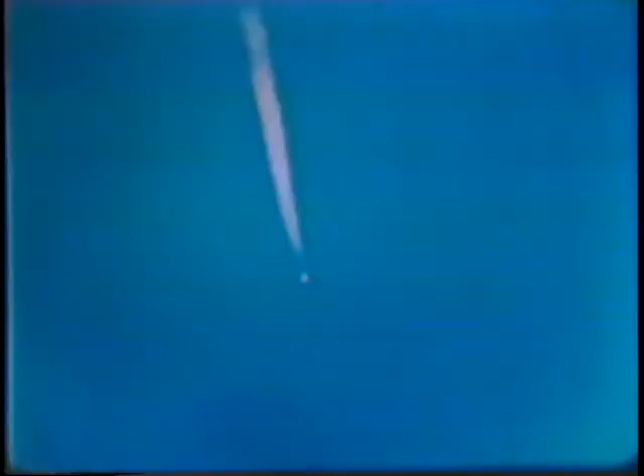Our ballistic missile early warning system tells us differently. 7, 6, 5... Not ours, but theirs. 3, 1... And if it is theirs,

and this is ours, a better design on the drawing board is no immediate effective countermeasure. Our birds must fly when they're required to. The high complexity of modern-day weapon systems demands the closest possible approach to absolute reliability. There is no second chance. So there must be absolute process control during system design and system manufacture.

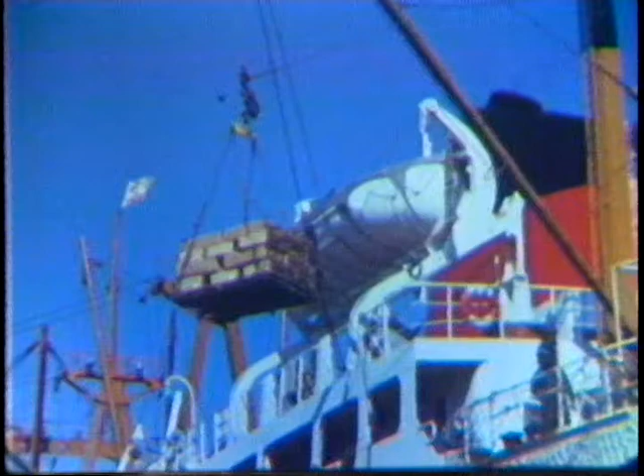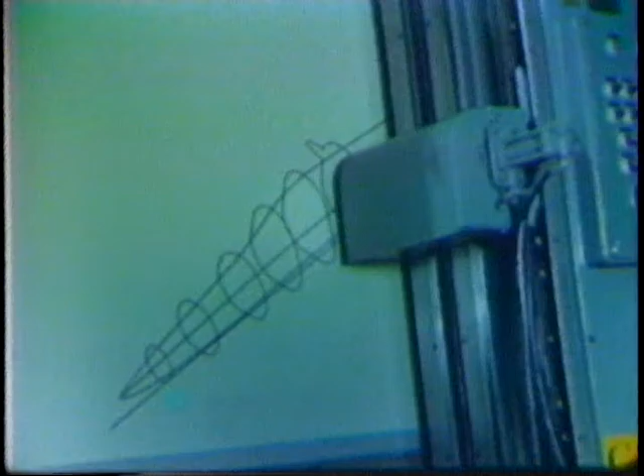We need newer and better weapons, and we need to get them from design concept and into operation more quickly and at a reasonable cost. We need new and better products for civilian consumption, products which can compete with foreign goods here at home or in foreign markets.

We must have modern manufacturing, as modern as we can make it. Modern manufacturing is a command performance. Command performance. Well, we don't usually have enough command of our process to get the performance we want.

Of course, it takes a lot of time to get from a set of new drawings to a finished product. But time is something we don't always have. The period from development to product is growing shorter and shorter. As someone said, time has collapsed.

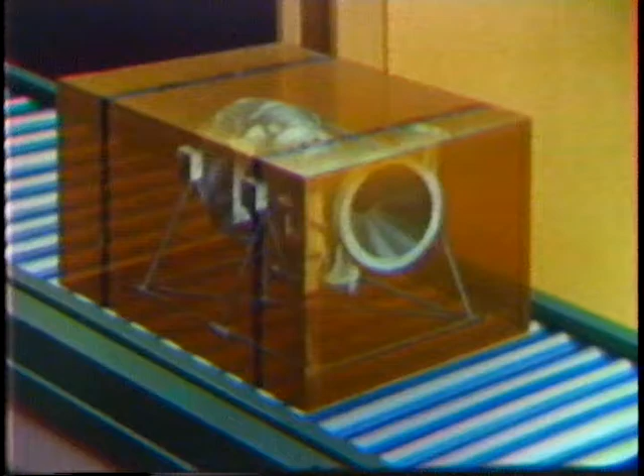And that component we were talking about is only one of many making up the complete product. Well, how could you do all that so quickly? Not only so quickly, but in much less space. You'd need a much larger plant to do this by conventional methods.

Oh, this is not conventional. Not at all. This is a modern plant. Really modern. What do you mean by that? When you give your command over the mic, which may be in the plant or remote, almost anywhere, the information feeds into a voice converter, which translates your language into a language which the computer can understand.

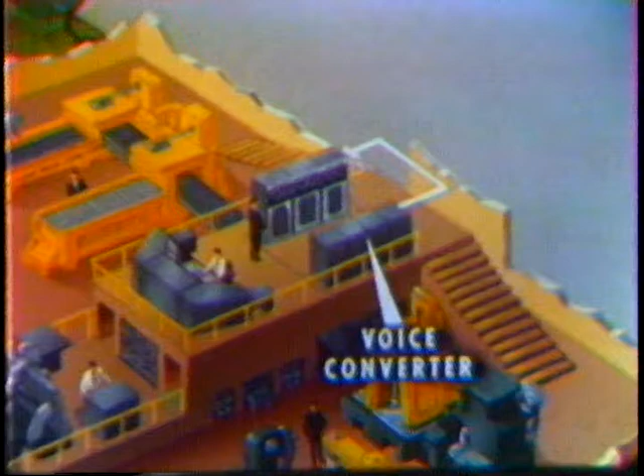The computer analyzes your request, then draws on its store of information to produce a series of tapes, which feed into a production control center. This center not only controls each of the machines, but the flow of parts as well, acting as a scheduling unit.

Now all of the manufacturing units are actuated. Basic shapes are routed to production centers for complete processing. Completed components are then checked automatically by inspection machines, then sent on to a robot subassembler. Subassemblies proceed on to a robot for final assembly, and then on to shipping.

That's what I call command performance. Of course, I've oversimplified the process a bit. You mean you've been putting me on, don't you? Not exactly. This is not as fantastic as you might think. Take the computer, for example.

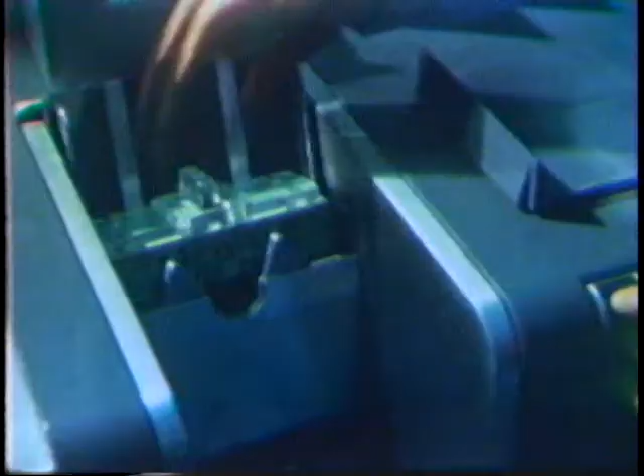Computers are fairly common today, although we still must talk to them with cards or tape rather than directly. But they're getting more sophisticated all the time. And from this information, a control tape is produced. Control tape for what? To control a manufacturing process.

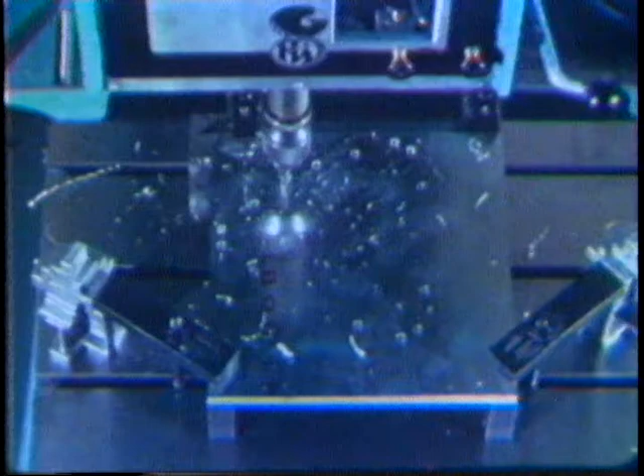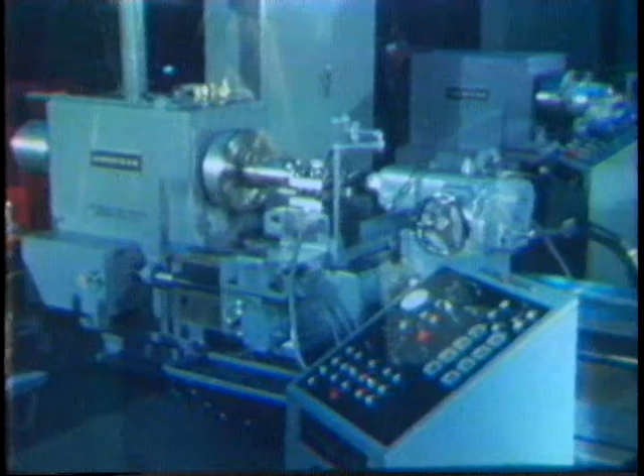Now these machines are in existence today. Inexpensive tape-controlled drill presses. The more sophisticated turret drill presses. Vertical turret lathes, capable of high-accuracy contouring. Tape-controlled engine lathes, with equally exacting contouring and thread-cutting capabilities.

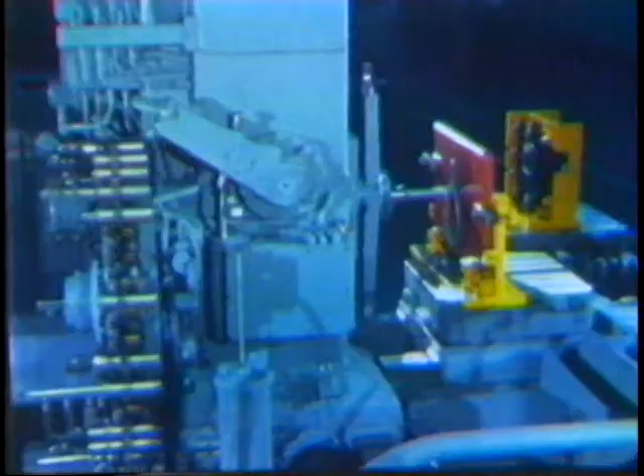High-precision multi-axis profiling mills. Machining centers that change tools, mill, drill, bore, ream, and tap. In many cases, they can complete the entire manufacturing process in just one setting, fully capable of doing that job of yours we were talking about, and even more.

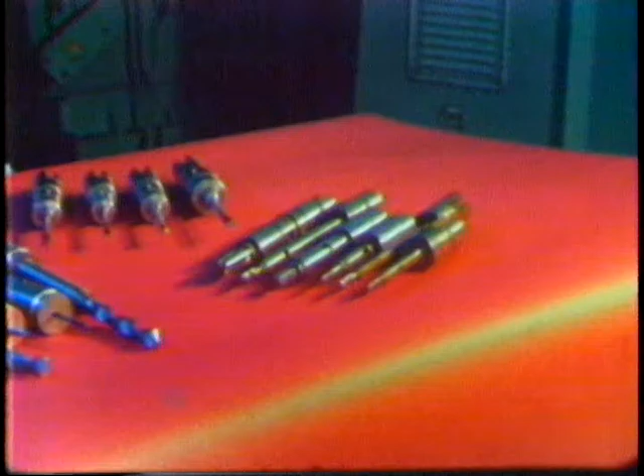Now, what different tools would you need for this piece? 6 different milling cutters, 4 sizes of drills, 4 reamers, 6 taps, and 4 boring bars. And where you needed 8 machines to use these tools, the whole batch is loaded into a magazine for use by this one machine.

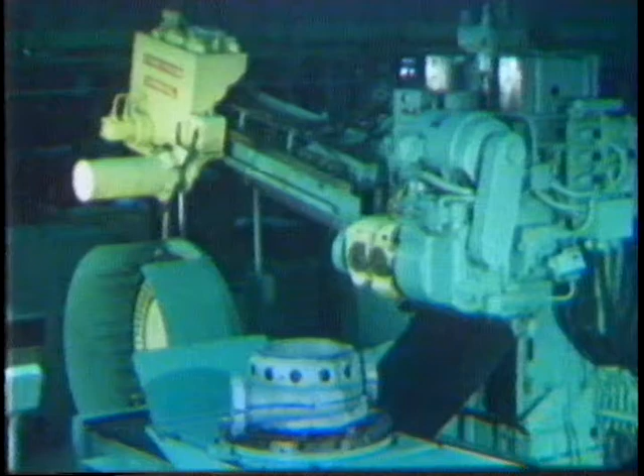All the instructions to the machine are on a punched tape. The intelligence on the tape tells the machine exactly what to do. This is called numerical control, which is one of the means of using mathematical definitions to furnish intelligence a machine can understand. There are many methods of accomplishing this. However it's done, it certainly shortens the chain of command and greatly reduces the opportunities for a breakdown in communications.

There's the same casting you would have started with in your conventional shop, but notice only clamps are required. The machine itself will even make its fixtures from tape control if necessary. And there you are, all the machining done in only 45 hours.

How long would it have taken in your shop? About 300 hours to machine and 26 weeks of lead time, after you've tooled up. Remember, the lead time here was only 2 weeks. If you need a second, third, or fourth piece, you get them in a matter of hours, all exactly alike. Now that's performance.

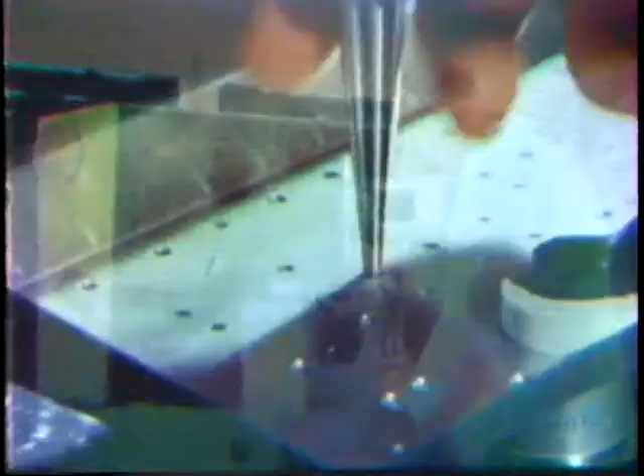What happened to automatic inspection you were dreaming about? That was no dream. They're already in existence, too, and research and development are making them better all the time.

On this machine, a probe is guided by a tape similar to the one used in manufacturing the part. The measurements are recorded for inspection and record.

But you still need an original detailed drawing, don't you? Not necessarily, but if you want one, it can be made from a numerical control tape too, operating an engineering machine. Often the drawing can be made at the same time the part is being made, using instructions from the same tape.

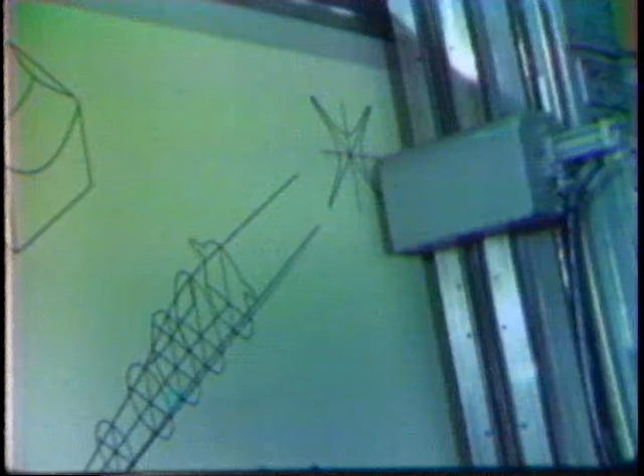I noticed the loading and removal from the machine is still conventional. But it needn't be. You'll find automatic loaders and transfer mechanisms on a lot of production lines today.

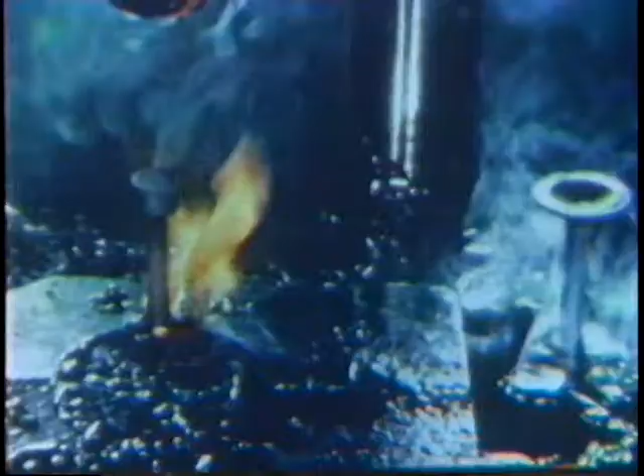This automatic material handler remembers every sheet in its inventory and will deliver it undamaged in seconds.

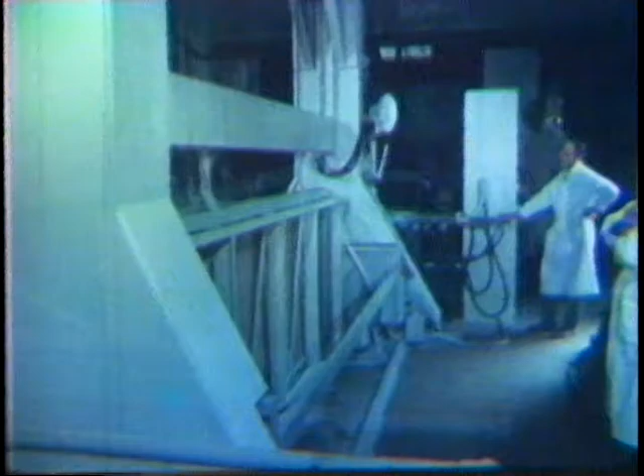This robot manipulator will perform a variety of handling operations. It can be easily taught to load, unload, and assemble parts because of its electronic brain.

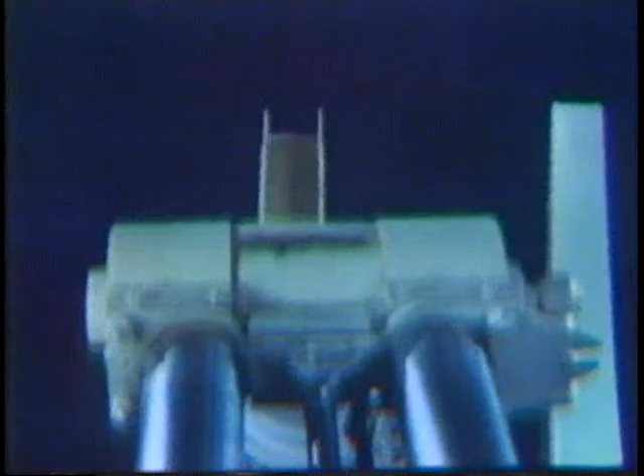So you see, we have practically all the elements of our plant of the future. It's just a matter of time before someone puts them all together to make the dream a reality.

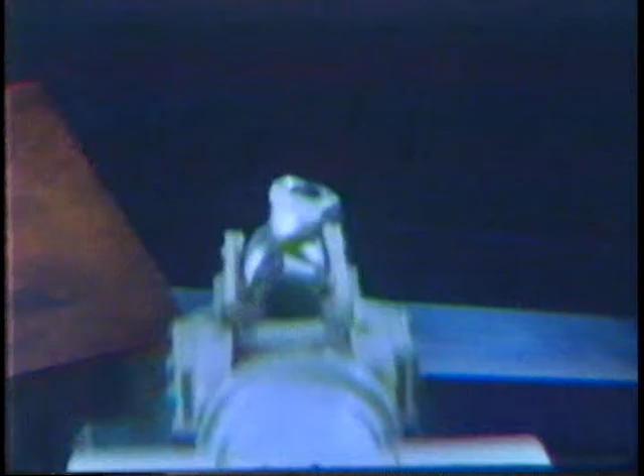I don't know that anyone has ever produced a crystal ball on one of these machines, but you don't need to be a fortune teller to realize that our success in aerospace depends upon our national capability to produce combat-ready systems with complete reliability. We must produce first, best, and at the lowest possible costs, which are consistent with reliability and reproducibility.

This means that we must be able to manufacture from all sorts of new and exotic materials. It means we must be able to produce structural members with a high degree of configuration complexity. It means we must produce with greater dimensional control.

Some large rocket engine inducers, for example, can't be produced to design concept by conventional manufacturing methods. It means that we must produce components which have structural integrity.

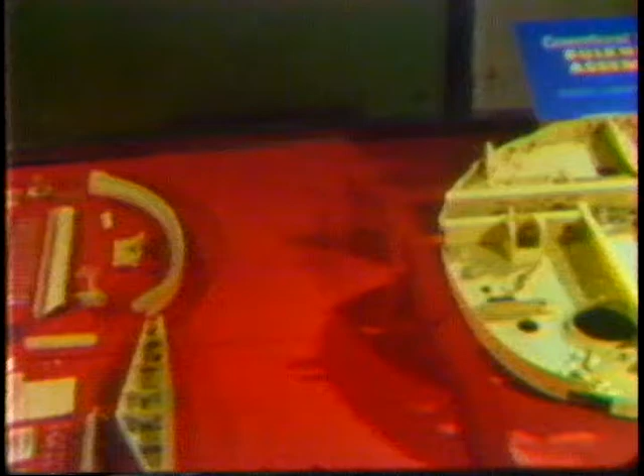This aircraft bulkhead was built up of over 90 different parts, requiring more than 1,000 rivets and high-strength fasteners. You can imagine how long it took to tool, machine, and assemble all these parts, and you can imagine the possible human error involved.

The more modern one-piece bulkheads have greater structural integrity, but they were still expensive. These one-piece bulkheads were first produced by conventional methods, using specially designed tracer-controlled rotary tables with many coordinated overlay templates and tracer patterns. It took 160 hours of machining time to produce one bulkhead, and at considerable cost.

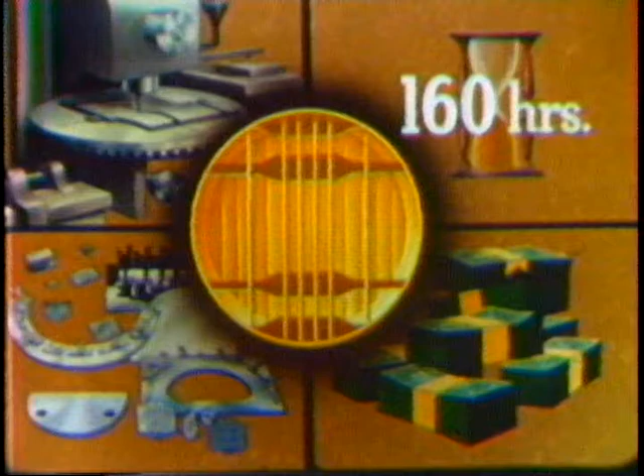The part is now programmed on a numerically controlled skin mill to machine two at a time. This requires only two sets of vacuum chucks and nine reels of tape. The time was reduced to only 9 hours per part, and the cost reduced by 80%. In addition, there's a 25% reduction in weight.

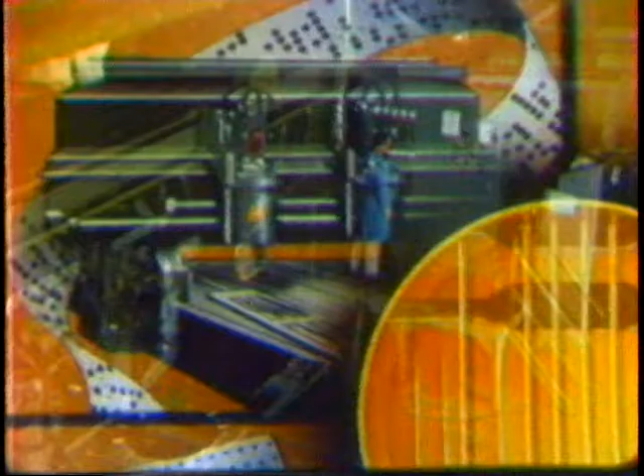Command performance? I'll say. But you can best get it with numerically controlled machines.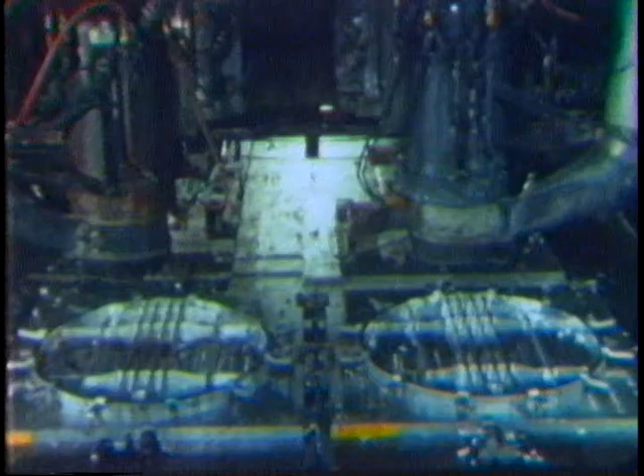Can this type of control be applied to other types of machines? Certainly. There are machines that automatically position and punch all types of panels.

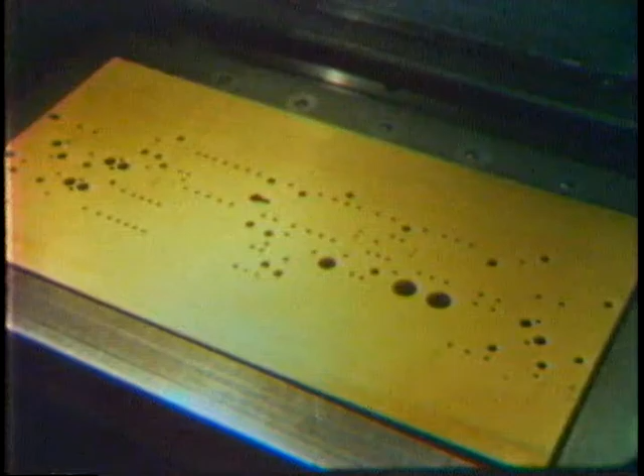Machines which build up rocket motor cases by the controlled winding of glass filament.

Machines that position connector panels for wiring, and machines that position and make the wiring connections on assembled electrical panels.

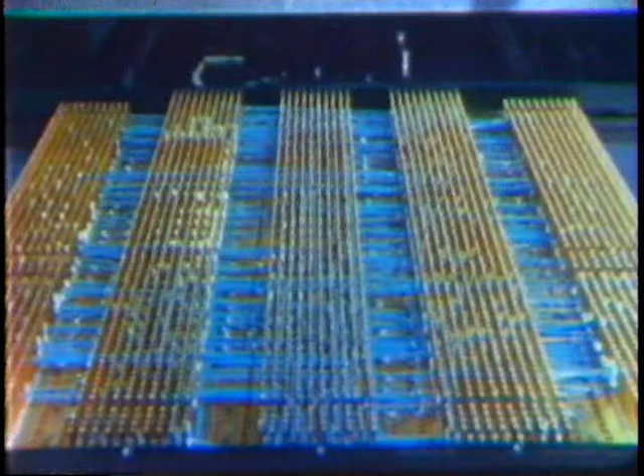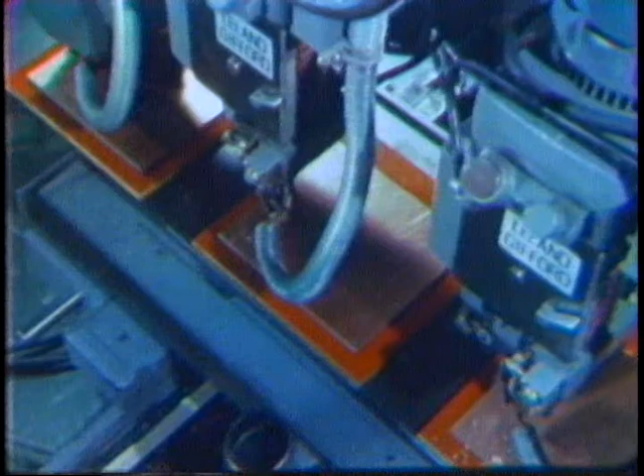Machines for drilling printed circuit boards. Machines for inserting the components in these boards.

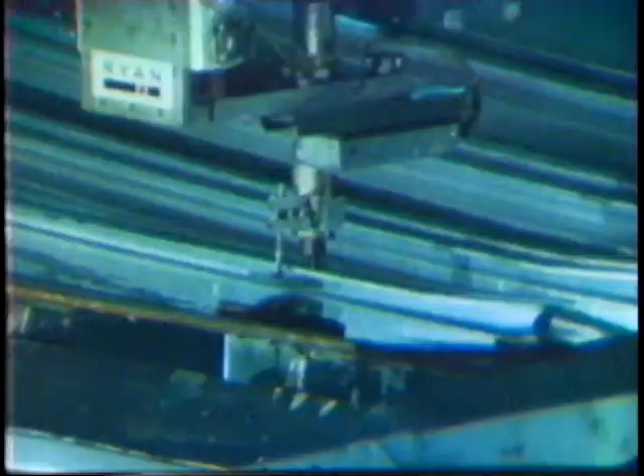Machines for spot welding, which saves 72% in labor costs. This machine has proved invaluable in spot welding fuselage sections.

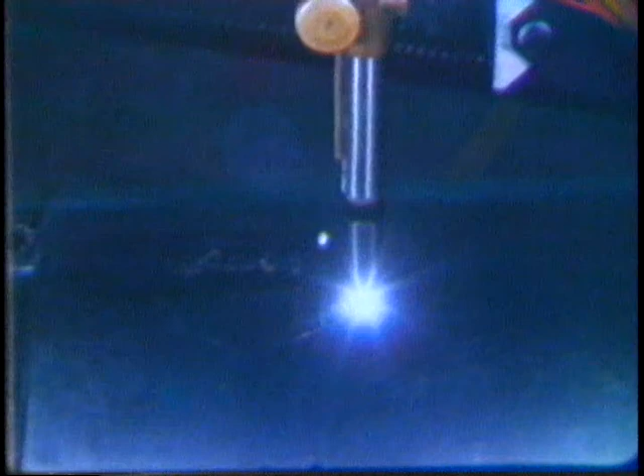The more complex fusion welding also can be performed by numerical control. The tape not only controls the positioning and movement of the arc, but also the welding factors, gas flow, current, and the like. In guiding the arc, the control permits blind welding down through one structural member to fuse it with a hidden member below.

The result? A stronger weld, a member with more structural integrity. A more reliable weapon system.

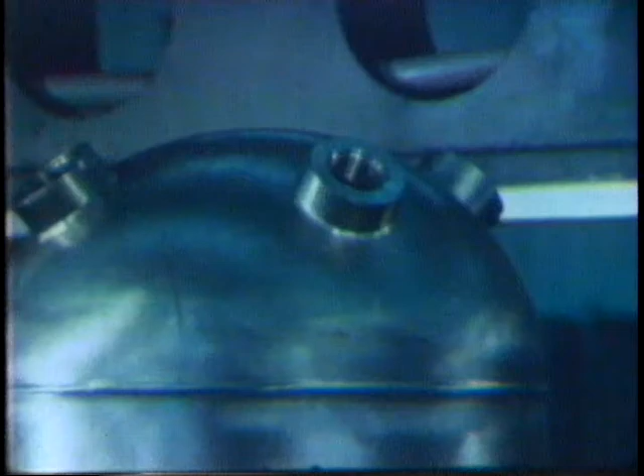Tubes can be bent by numerical control also. Tailpipes that fit any car precisely. Or the miles of plumbing used in modern missiles, and all without the need for separate jigs and setup time.

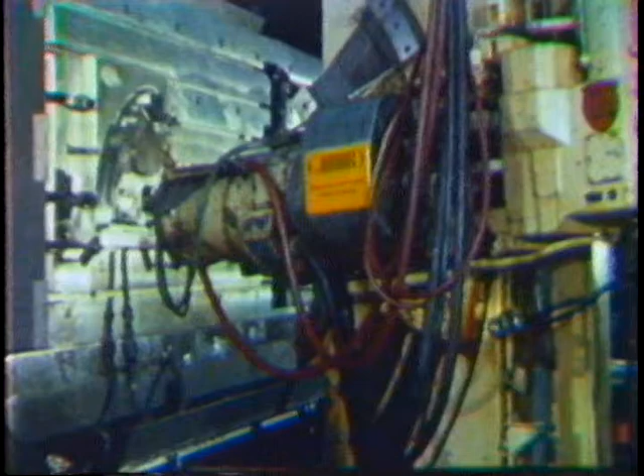By far the most versatile and flexible are the numerical controlled machines. For one-piece or production runs, they're the answer to involved machining operations. And for machining control, you can't beat instructions which are fixed and not subject to human error or emotion.

Why, this tape could be sent anywhere in the world to a similar numerically controlled machine. And it would produce a part interchangeable with the one produced here from this tape.

May we backtrack a moment? Surely. Just how do the instructions get to the machine in the first place? Well, let's begin with your own sketch of some part. Make it complicated. We'll hog it out of a block. Let's use master dimension. Okay.

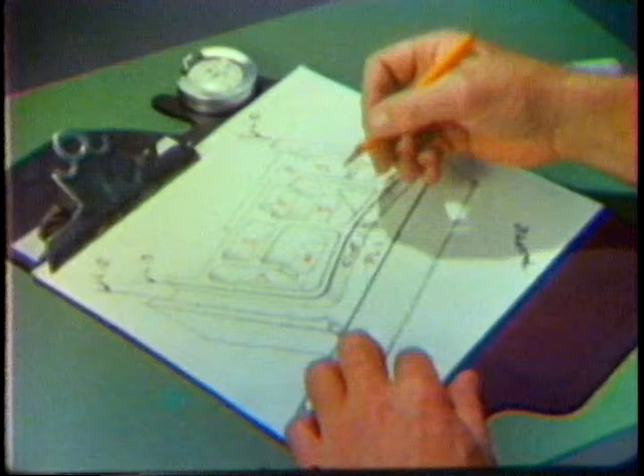There you are, with all the essential dimensions, but scarcely something a machinist could work from. That took you about an hour.

Now, we'll take this to a programmer as the next step in tape preparation. And there's the program. Now, let's see, that took about an hour and 45 minutes. Add that to the hour for the sketch, and the 5 minutes it took us to get here, and the total's 2 hours and 50 minutes.

Those words on there look sort of familiar, but different. That's right. They're a kind of pidgin English.

This information will command the tool to start from the point called set point, which is defined as the point with coordinates 1, 1, 1. With the tool on the right, it is instructed to go right along the line base. At this point in the operation, the tool is sent forward to start cutting a previously defined circle about a previously defined point 2. Now here's that circle on the sketch. You can see it's a language that you can readily understand and use, and one the computer can understand too.

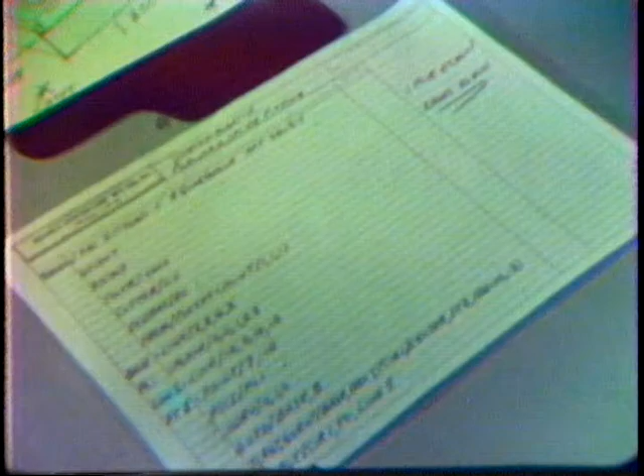As of now, conventional computers do not accept oral commands, so the instructions are put on punched cards or tape.

We're moving right along. Just 10 minutes for that job, for a total of about 3 hours. Now the computer operator gives the commands to the computer, which translates them into machine language.

And here are the commands we'll take to the machine. We've now spent only 3 hours and 20 minutes. That's really chopping down lead time, isn't it? Yes. I expect it would have taken me weeks to design a tool for this job. It might be a good idea to think about modernizing then.

This whole system's called numerical control. Well, the machines are operated by numerical control. When you talk to a computer, though, well, that's a little higher order of communication. I suppose you might call it symbolic control at that point.

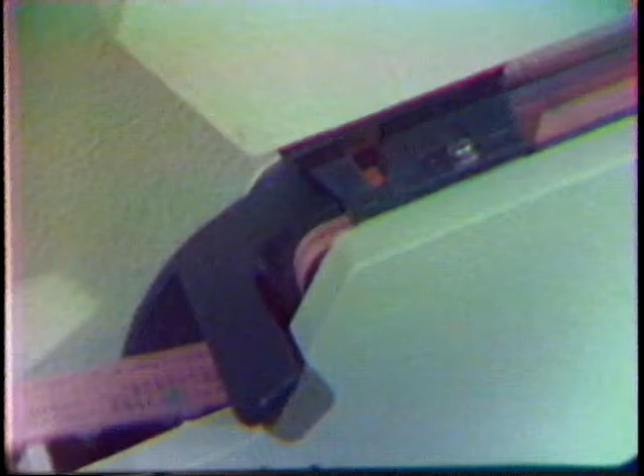But look, your part is already being manufactured.

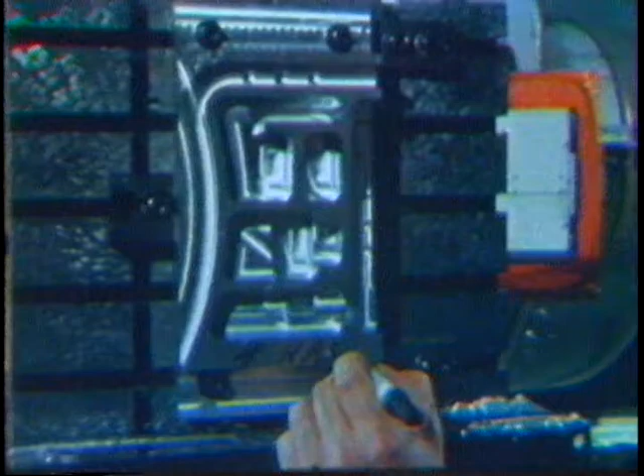There's your part. Just 4 hours after you started making the sketch. You want to check it out? You bet. Amazing.

Absolutely amazing. You see, what happened was that the machine did what machines can do best, and humans did what humans can do best. You did the designing, the creating. The programmer planned the process from his knowledge of machining and the particular machine. And being human, you were able to start a chain of command to the machine, a very short and very exact chain. As a result, you obtained a superior performance from the machine, far better than by conventional methods.

And you get the same performance time after time, because the commands cannot change. And that's why you call it command performance. That's right. Well, what about the actual joining, forming, or removal of metal? What's new along these lines?

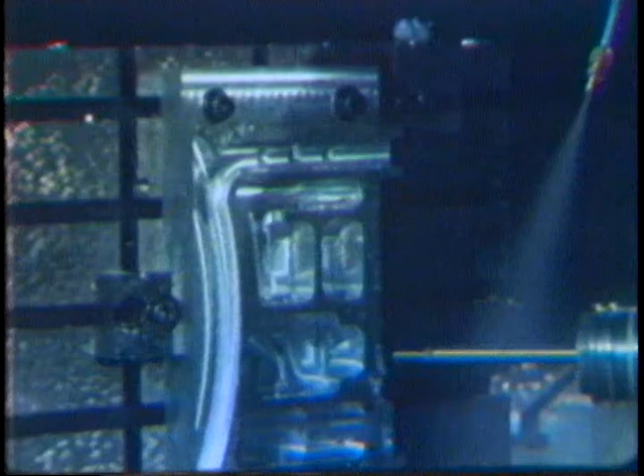Plenty. Electron beam welding, for one thing. Here, even two dissimilar metals can be permanently fused together by the high-velocity electron bombardment in its vacuum chamber.

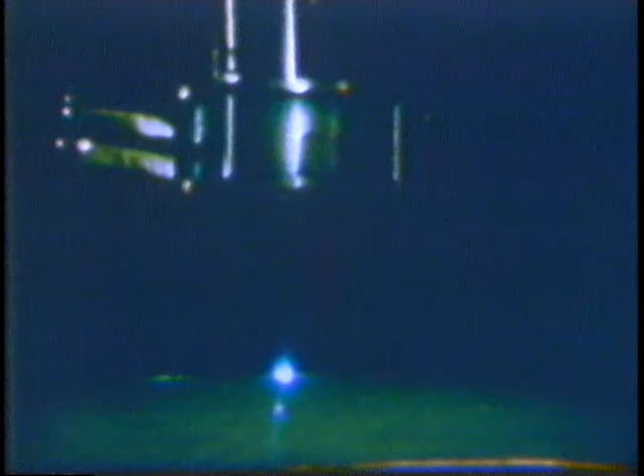Electrolytic machining, for another. The cooling holes in this turbine blade were eroded to exacting tolerances by this STEM drill. The hollow drill electrodes never touch the material, so they need not be reset or replaced.

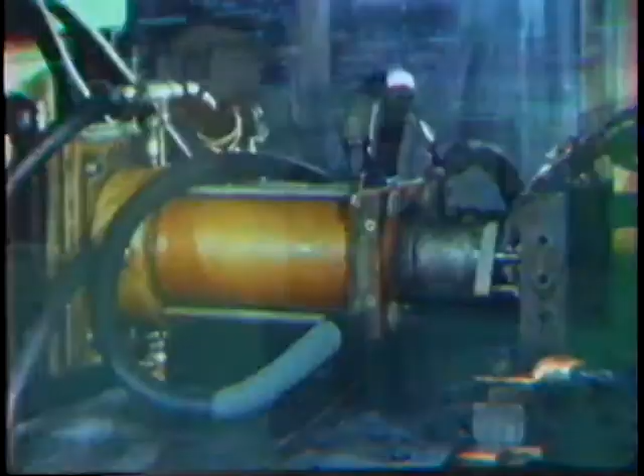Just the opposite of electroplating, huh? Correct.

This finished turbine bucket was shaped from high-temperature material, and here are the shaped electrodes that were used to do it. The process replaces a dozen conventional machines and produces a yearly savings of about 80%.

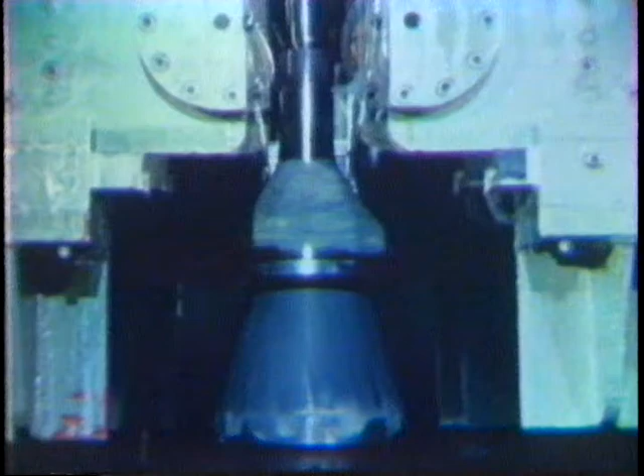When subjected to enough pressure, metals become plastic and are easily formed. This vertical shear former produces turbine compressor shafts at a savings of $1,500 per part.

Similar machines will turn out shapes such as cylinders, cones, and rocket motor cases from practically any metal, including many of the exotic alloys.

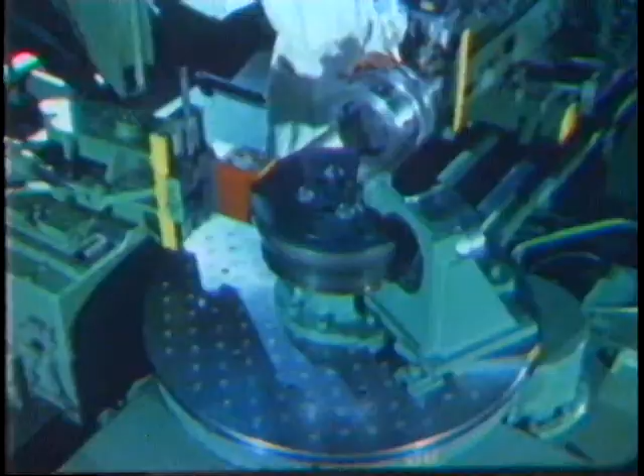Or suppose your product needs formed parts, like this. This machine pre-stresses metal to its yield point and has a tension control system, so that forming is accomplished with high accuracy.

This jet engine part was formed from Rene 41 in just 2 minutes, and the savings over conventional methods is 80%. A similar type of process will give you savings of up to 90% on drawn components like this, and permits the use of inexpensive dies.

This blank holder, adapted to a conventional press, pre-stresses the metal and makes it more flowable than plastic. By adjusting the stress, almost any metal can be formed using the same die.

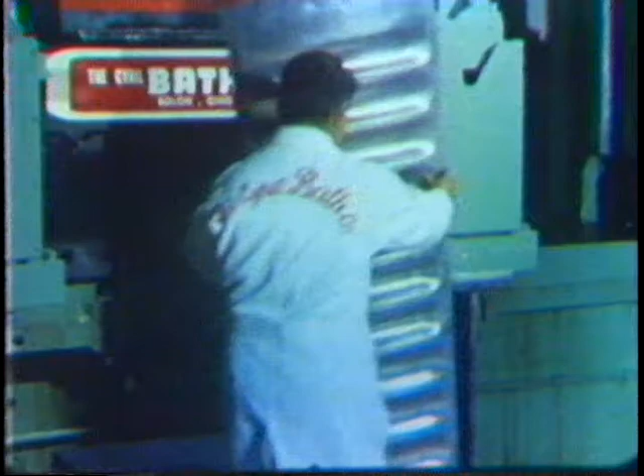Normally, 3 draws would be required to produce this part, with 270 hours of handwork for finishing. But here it is, produced in 1 stroke, holding its shape without springback, and maintaining that shape throughout subsequent welding.

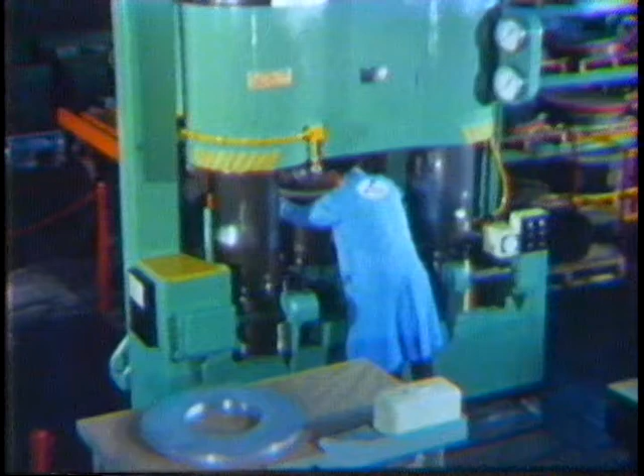This hydroform turns out complex shaped parts in seconds that formerly took hours to fabricate, assemble, and weld. The rubber bladder reduces tooling to only 1 inexpensive die.

Want more savings in forming metals? Perhaps electromagnetic metal forming is the answer.

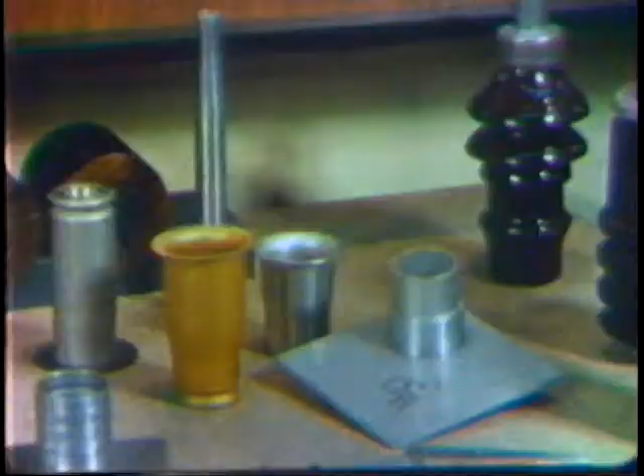Now, this process uses powerful magnetic fields to swage, expand, compress, coin, shear, and assemble conductive metals without mechanical contact with the work. This machine uses the explosive power of man-made lightning to form parts.

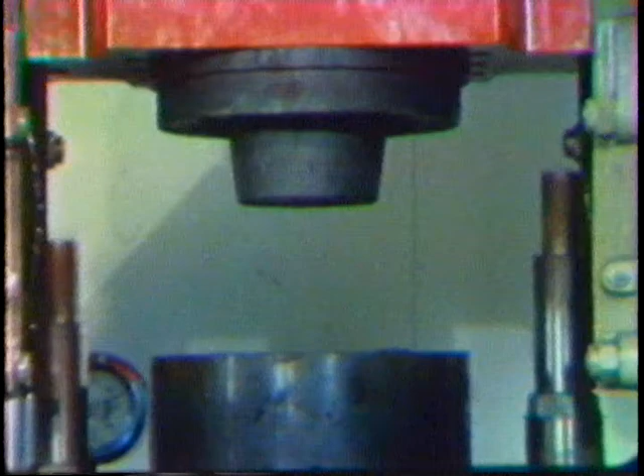What about forging? How about that? That's high energy rate forging.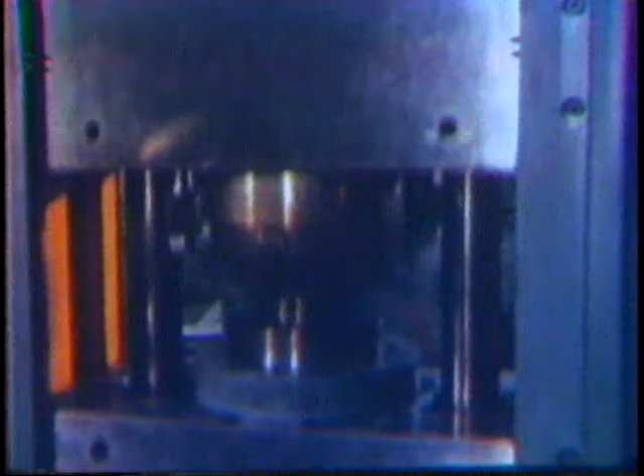These machines will deliver a terrific amount of energy in a split second to forge such materials as tungsten or even cast iron, as well as the usual materials.

High-tonnage mechanical presses also offer great savings in the production of precision forgings.

For testing electronic systems, there's automatic testing equipment. Here's a complete checkout of a wiring harness. This machine checks missiles, computers, servo systems, and the like.

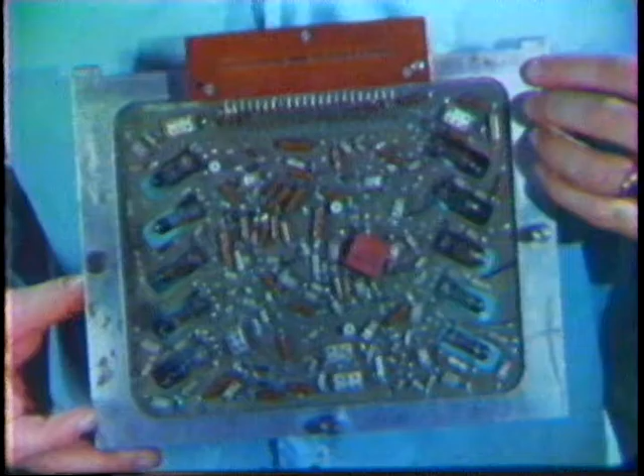The results of the tests can be recorded on a printed readout. And the savings? Well, in addition to the time, this piece of equipment replaces 150 separate pieces of test equipment required on many of the complicated checkouts.

Imagine what all these methods of modern manufacturing are going to do for the designers. And of course, you've seen only a few of the many new methods available today.

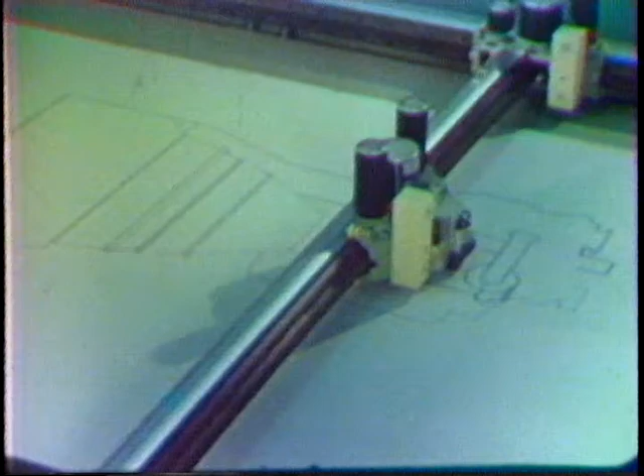No need for them to be limited by the restrictions of conventional manufacturing. They can now design a part to do the best job without compromise with manufacturing limitations.

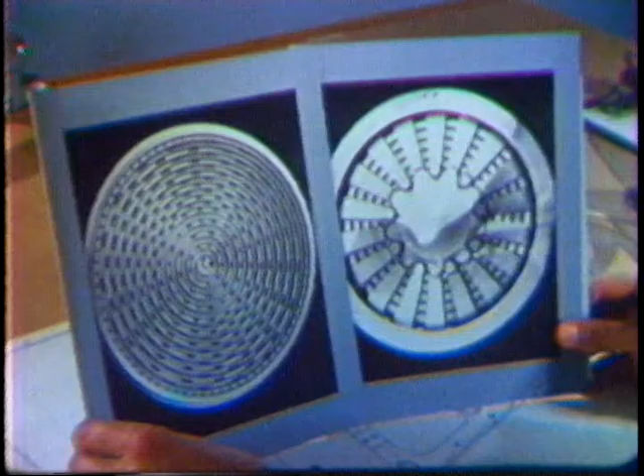I doubt if there's a machinist in the world who could have turned out this part and met the required specifications. Yet it's a vital part. And I know that without modern machining, it could never have been produced in time to get our missiles in operation on schedule. And believe me, we must be on schedule in these areas.

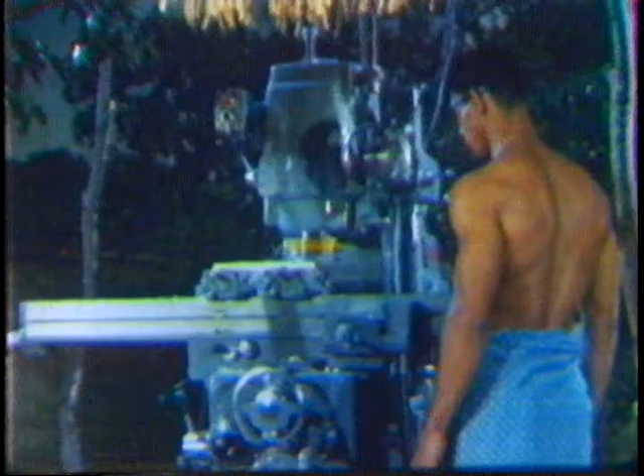Primitive? While even the most modern standard machine tools are efficient for general applications, they will not readily accept the numerical control input so vital for the effective production of aerospace vehicles.

We must modernize our manufacturing methods and go from design concept to finished product as quickly as possible. We must keep the wheels turning the best way we know how. We must apply what we know today and search for ever better methods.

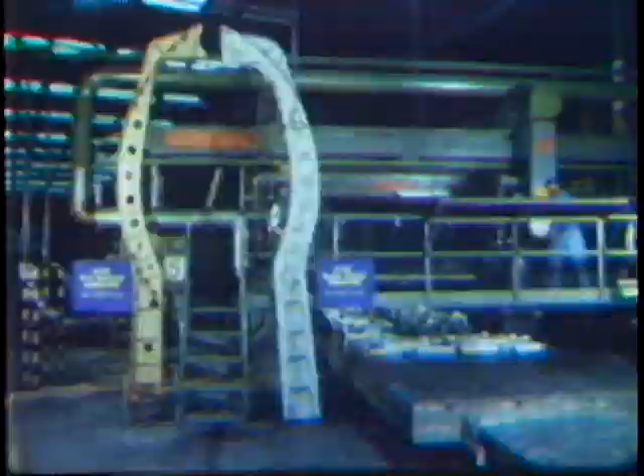This is a command performance for the survival of industry and our country.

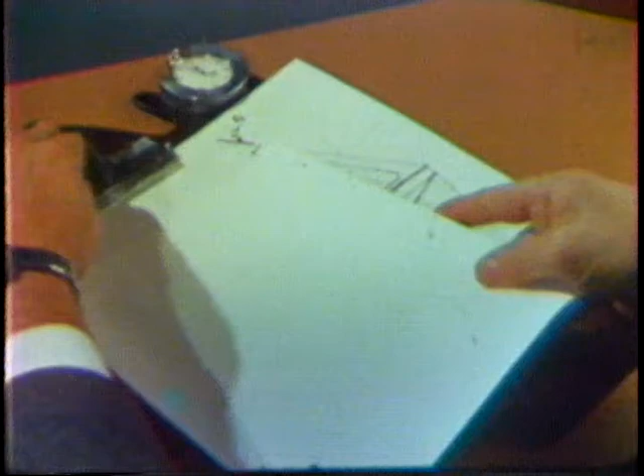Say, do you still have that clipboard? Sure. Here it is. Why? I want to write myself a note, so I won't forget something. See? This is going to be a command performance, too.

Good idea. Because the Defense Department expects its contractors to maintain a modern base in their facilities. In keeping with the advance of aerospace technology, we need the productivity, reliability, and repeatability that only modern manufacturing can provide.

And we all need the savings which can be effected in both time and money.